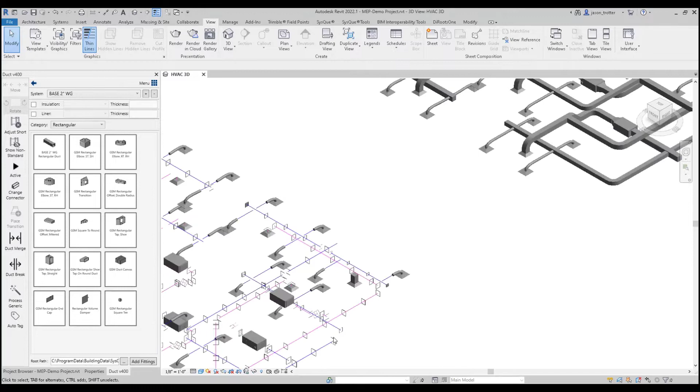One of the things that we added is the ability to apply a service type to the face-based flange that populates at your duct to fitting connections. So if we jump in here, take a look at, for instance, right on this duct to fitting connection here, remember that within Revit you can't graphically modify the system family. So the duct itself, you can't change the graphics on. So what we're doing is we're using our couplings to represent the joint at that end.

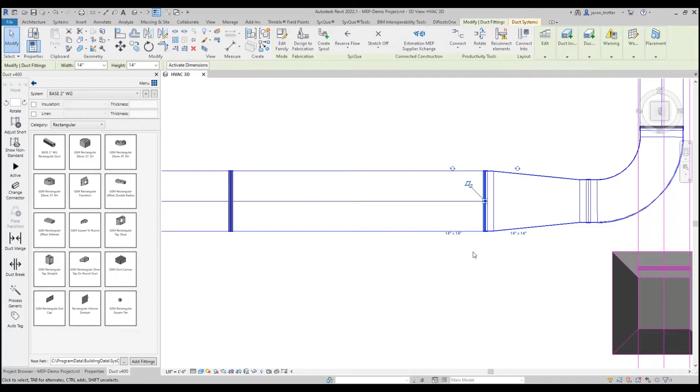However, when we touch duct to fitting, we have to populate a face-based flange, being that if we were to go duct to coupling to fitting, we would change the way that Revit behaves when you nudge and drag around your duct elements. So what we do is we just populate a face-based flange that doesn't have a physical connector to any of these elements, and it just represents the connector. So if you need to coordinate for that space, you can.

One of the automation processes that SysQue does is place that face-based connector, and now with 9.3, we give you the option to apply the service type to that connector. So you'll notice that in my project here, my duct runs are colored with an outline based on the service type. That's being pushed here through my service types. So if you go in, you can see that I have green for exhaust, return is magenta, and supply is blue.

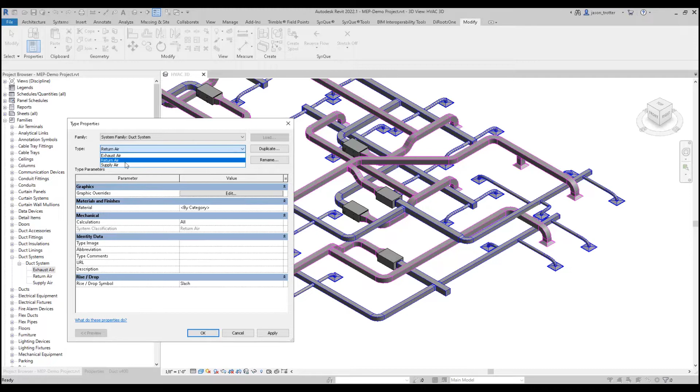So now being that we have a face-based connector that has some nested families in it, the element is not going to want to color with the service type. So if you're pushing the service type here, you have an option. So the element is going to appear dark, whether or not you have a service type color being applied, and I'll kind of outline that a little bit here.

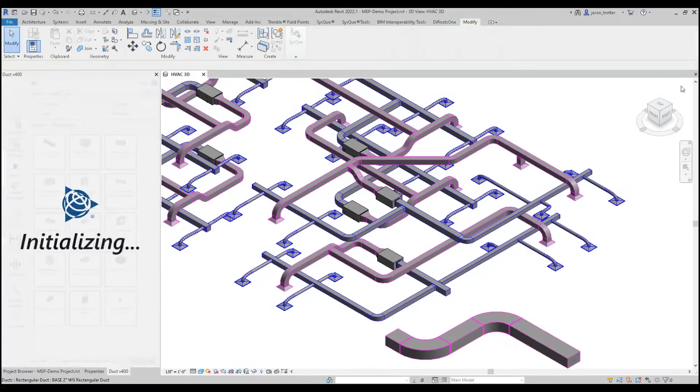So I'm going to go ahead and select this, and I want to give you something that's going to have a more prominent flange. So let's go into a TDC, and we'll just model this out real quick. And I did run this with auto break on, and you have to forgive my filter, I have a SysQue process filter, so I can see which elements have been processed with SysQue and what hasn't.

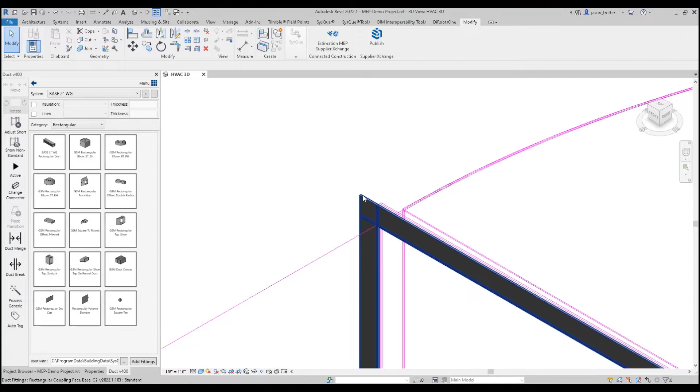But you can see that these flanges here, the edge of them will take on the service type, but the whole flange itself is not going to if the service type is not applied, right? So what I'm going to do is take a look at the settings. And being that this is undefined, that is going to be due to the setting for face-based flanges being turned off. So as you can see in the tooltip, selecting the option will apply the associated service type to your duct to fitting face-based flanges.

Just keep in mind that adding this may increase SysQue processing, and the degree that it increases the time that it takes to process your elements is all dependent on the environment that you're in. Obviously, in a larger, more complex model, that degree is going to be a little bit greater than it would be in a smaller model. I think this model here is like 60 to 80 megs. I don't recall the exact size.

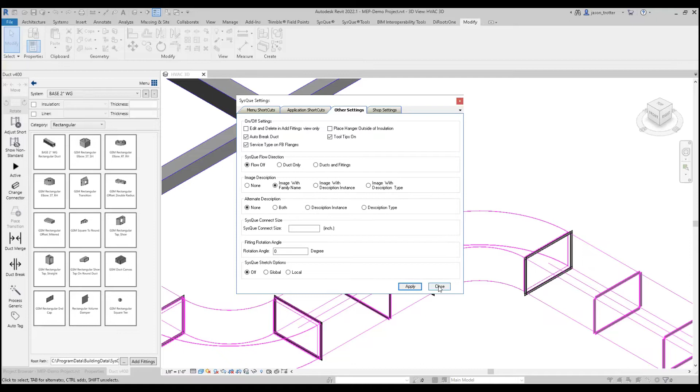But what I'm going to do now is I'm going to go ahead and turn this on, and you can see the difference. So I'm going to turn that on, and then I'm just going to reprocess this. So you kind of saw how fast it processed the first time, and then it does take a little bit of extra at the end to process the service type. So now if I jump in here and I click on this, you'll see that we're on return air, and that it does in fact outline on the edges with the service type.

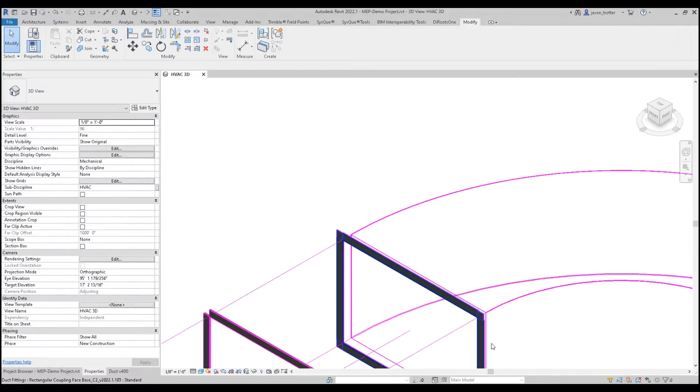Now, if you want them to appear a little bit better, you can use a filter. So most of you will have a filter built into your project. Some of you will not. If you don't, for instance, I don't have any filters applied to this, and there is actually a set of filters that I can bring in automatically if I don't already have one created.

So let's walk through that real quick. I'm going to go ahead and go to Open Project. And there's a location within your C drive where SysQue will deposit a project that gives you access to some pre-built filters. Feel free to bring them in, modify them, whatever you want to do with them.

I'm going to go ahead and navigate to C, ProgramData, building data, support, and within my build year template files, so I'm working in 2022, and you see here I have 2022 template files, and within here I have this 2022 SysQue filter project. So I'm just going to go ahead and open this,

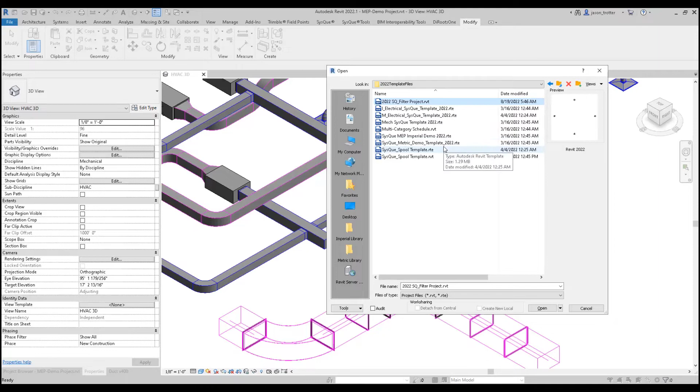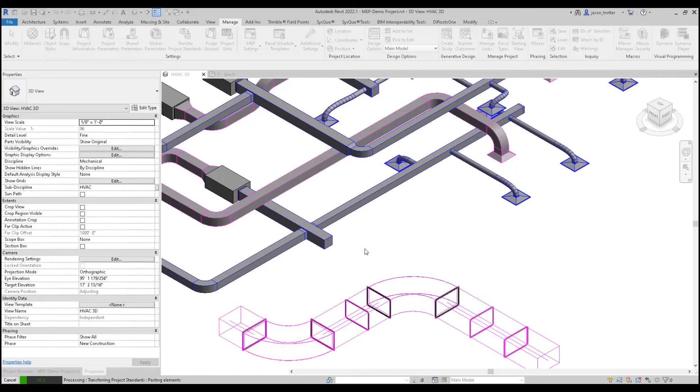and then I'm going to go back to my model and go to my Manage tab, and this is basically transferring project standards. I'm going to click Transfer Project Standards, copy from my filter project. I'm just going to check none, and I'm going to go down to Filters and click OK. And it'll quickly import the filters from that project. So when I'm done, I can go ahead and close this model.

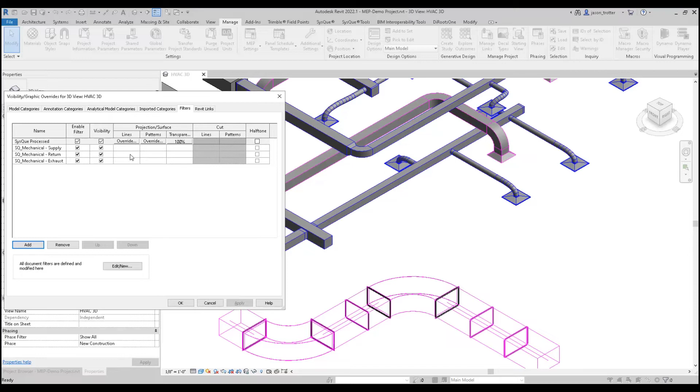And now what I'll be able to do is come into my filters and go to add, and then you'll see within the filter list these SQ underscore filters. So I want to go ahead and grab SQ Mechanical, return and supply, bring those in, and then I can give them the same override as my system, my service type. So I'm going to go ahead with supply. If I remember correctly, it was blue. Hit OK. Return was magenta. I think I had exhaust as green.

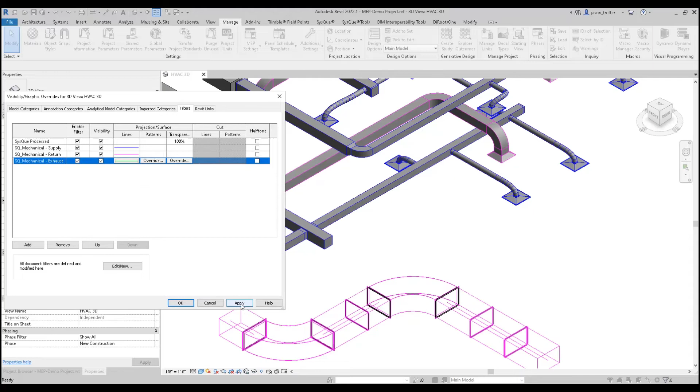And you'll see what that did is brighten up the color on those flanges. So now it's more prominent for you. Especially if you're working in a plan view or an overhead 3D view, you don't really even notice the flanges at all as being anything different.

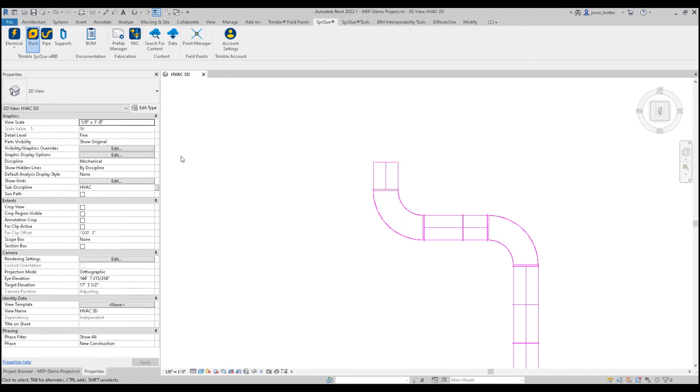Now, what do you do if you've already modeled with these flanges and you want to come back? So let's take a look at that real quick. So I'm going to go ahead and launch SysQue Duct again. Let's get back into my system. And then I'm going to jump into the settings, and I'm going to turn that face-based flange off. And then I'm going to go ahead and just reprocess this because I want it to populate with that setting off.

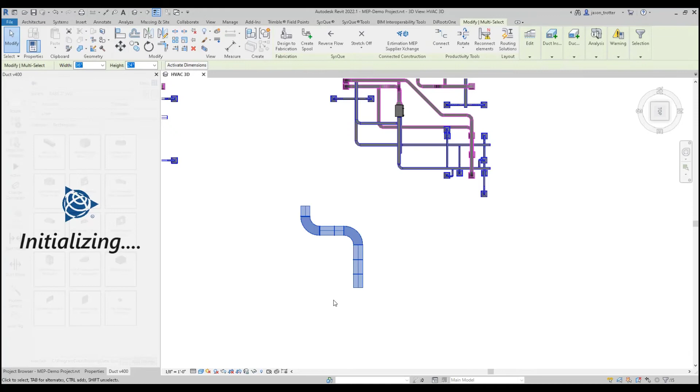Okay, so as you can see, again, we're back here to the dark flanges, which for some of you, that'll be just fine. Just carry on and work that route. If you do want to come back after the fact, we have provided a method. So I can just select the flanges and the connected components, come up to the menu, and there's a utility right here in the menu that is apply face-based service. You see from the flyout, we're listing use this utility to apply the associated Revit service type to the face-based connectors in your selection set.

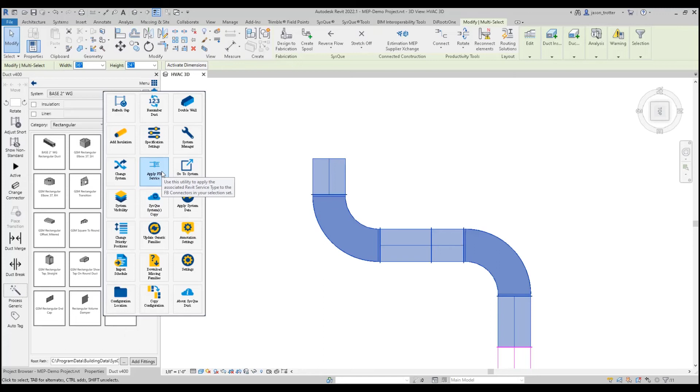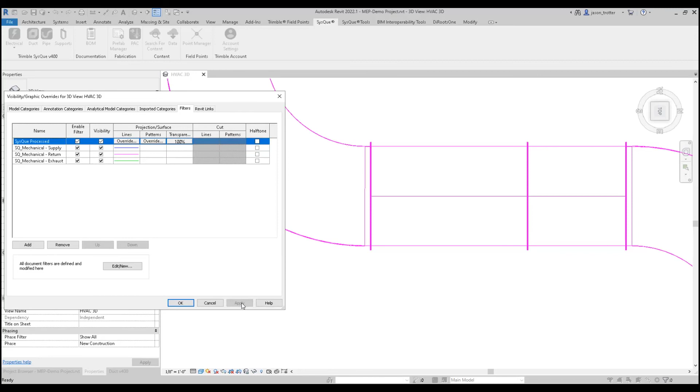So I'm just going to click this, and it's automatically going to apply the service type to those flanges. Now, sometimes filters don't play well with this because you can see how the edge took on the color and the body did not. Sometimes you have to go into your filters. And for instance, this is my return. So if I disable that filter and then enable that filter, you see how that actually kicked in the color and made it more prominent.

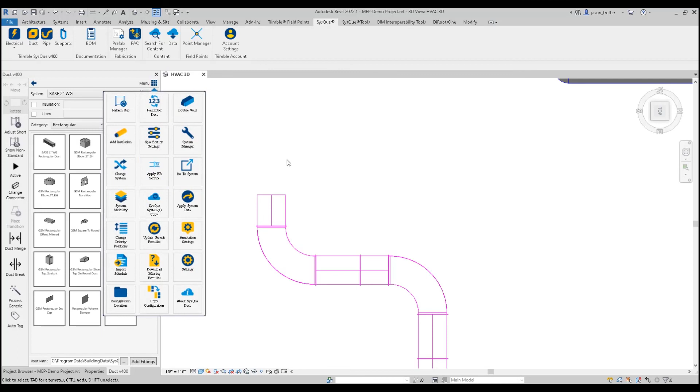Again, if you turn off the face-based service type, SysQue will process faster to some degree. And if you'd like to, at the end, you can always select your elements and run the utility independently, or you can turn your option on and have it apply the service type at the time of processing. I think that wraps our video.